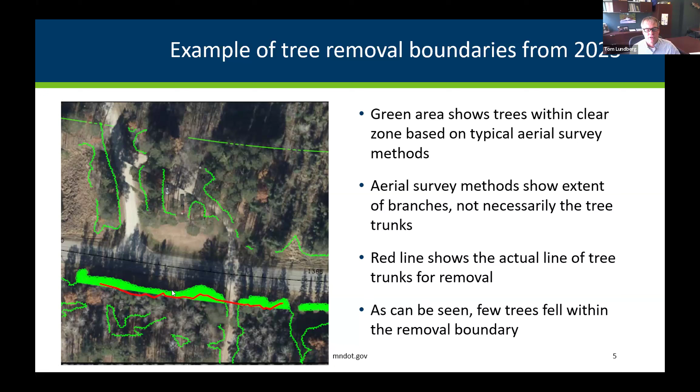This picture shows a little bit of what we're doing for the cutting when we did the project back in 2023. The red line follows the trunks of the trees, and the solid green area is more of the canopy, showing just how little we cut along there. You can see some of the shade trees hitting the roadway in this area, so you can see some of the shade issues we're dealing with.

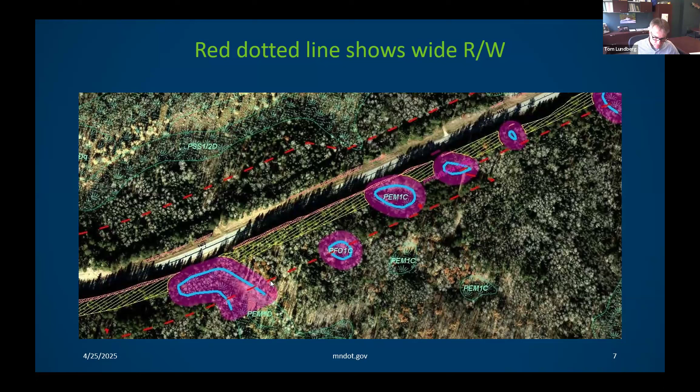So we worked with the U of M to get this study going. We actually started two winters ago and went through this last winter, which brought us up to today. I'd like to say we hit the ground running, but we really didn't that first winter. We were working with sensor issues, cameras out there, different types of data collection, and we were really just getting things going and figuring things out more two winters ago.

Sorry here. Should have shut my phone off.

So 2 winters ago was kind of tough. This past winter, we got into the details and started to work our bugs out with the different data sets that we're collecting and things we were doing.

So I felt like we were getting more our feet underneath us and gaining some traction. The U of M staff is going to go into a lot of the details, so I'm not going to cover everything. But the one big thing we got this last winter that was huge was we were able to get a data collection device into our snowplow that was out on this corridor.

In the past, we'd load the plow up and they'd go down the road, and they might go on Highway 34 and do touch-ups somewhere else. It was really hard to track what they did, where, and how much was being used.

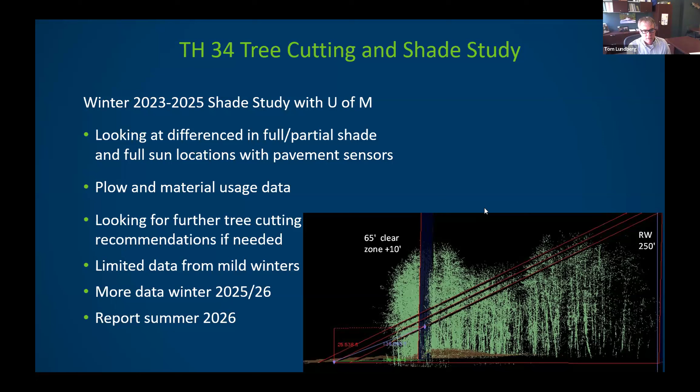We're constantly learning and growing as we go. So there's some rabbit holes, I think, that we still may go down with this. And then we'll look for potentially something in the summer of 2026.

So with this, like I said, we're looking for the results at the end of all this, whether we cut a whole bunch more, we limb some trees, we selectively cut some stuff, or maybe we do nothing.

Just to give you a pictorial here, this is a sun angle in March in the year. So if you wanted to get rid of the shade off the roadway, everything above that red line there would potentially have to be cut or limbed or something like that. So you can see what the shade is doing to the roadway.

At the end of the day, we'd all love it if we can limit the use of these behemoths that we have down the roadway with the time, the effort, the materials and things like that. If we can limit that, it saves a lot of money and resources, and it impacts the environment with the chlorides and things like that.

So there's the things that the practitioners and us are looking at, but on the environmental side, they're also concerned about the aesthetic value, the value of the trees, and the beauty of the corridor, the commerce that flows through it, and things like that. So those are some of the things we'll be struggling with as we move forward.

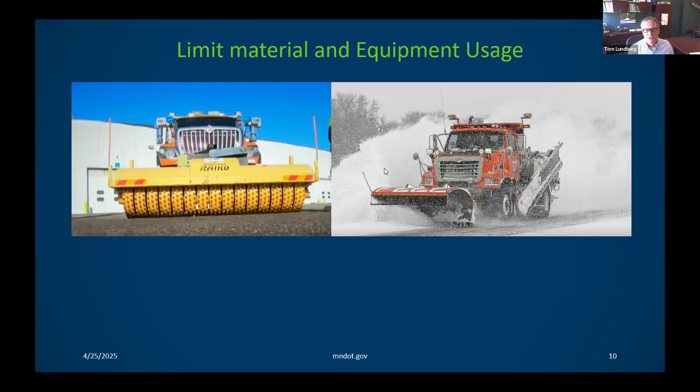So with that, I'm going to quit talking here, and I'm going to let Mihai and his staff jump in on some of the fun details that we've gotten into with the data collection and the techie portion of this stuff.

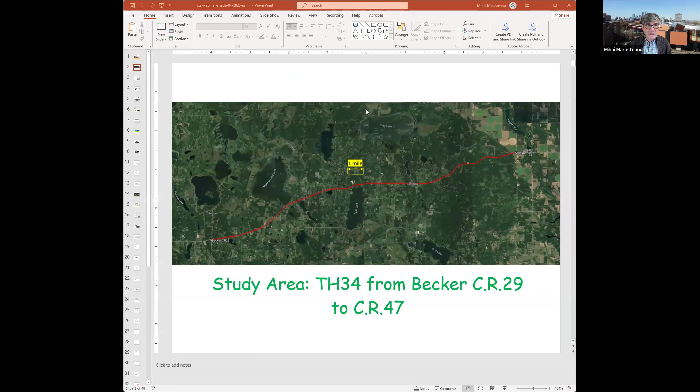And as Tom mentioned, basically we're trying to figure out what is the impact of the shade, tree shade, on pavement temperature that is then related to the amount of salt or other de-icing chemicals that are placed on the pavement. So obviously a safety issue, you don't want to have any skid problems, and also an environmental issue. And basically, Tom asked us, can you quantify this temperature disparity? I mean, we could see it. I think we can all see in winter shade versus full sun areas, and you see a big difference.

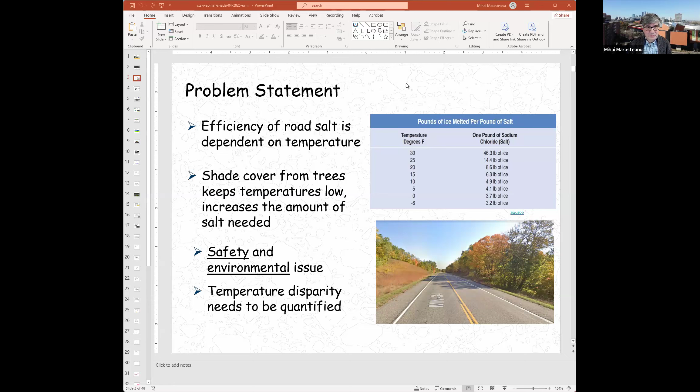So then we got to work, and the first thing that we wanted to do is to collect some data, use that data in a heat transfer model that would allow us to make predictions for various temperature regimes in winter, and include a shade factor that has not been evaluated before. There is some limited research on the effect of shade on temperature, mostly for hydrologic design on rivers, but not on pavement. So as far as I know, this is the first one that looks at the effect of tree shade on pavement temperature.

And based on this shade factor analysis, give Tom and his team enough information so they could optimize possible tree removal activities. As we mentioned before, we are all for trees and shade, but there are some particular situations where maybe there is a need to do some removal.

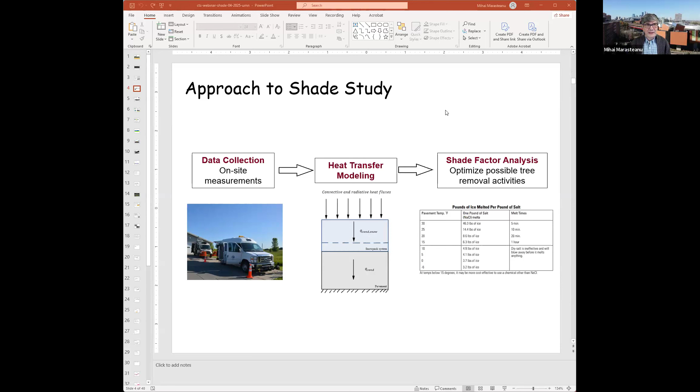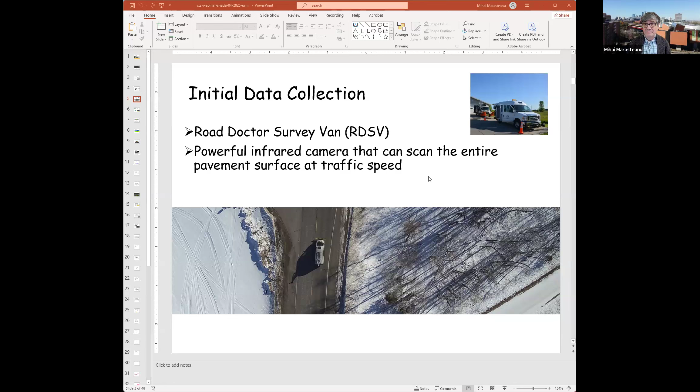And of course, we started with data collection. I'm showing here a picture of a very fancy device that our colleagues at MnDOT have. The one in the back here is a Road Doctor. We were very fortunate to have them come and collect the data using what is called the Road Doctor survey van. It collects all sorts of interesting information, including ground penetrating radar. But for our particular case, we used their infrared camera. They have a very powerful infrared camera that can scan the entire pavement surface at traffic speed and generate a lot of data. And we were able to get some information in February 2023. So yeah, we started working on this 2 years ago.

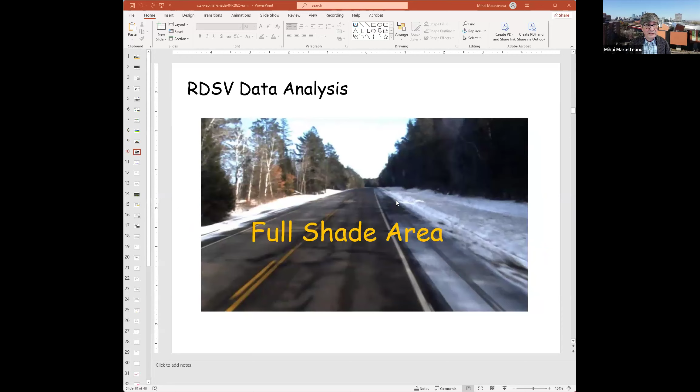And what we did first, we processed the data. We tried to look at the temperature profile for the locations that were in the sun and locations that were in full shade, and look at the difference.

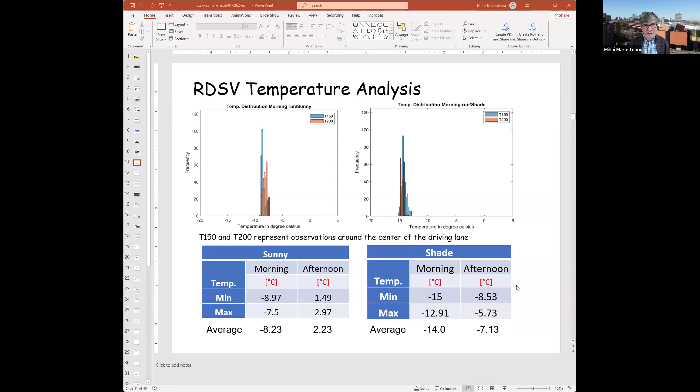In the shade, as expected, obviously much lower temperatures in the morning, -15. And then it went to -12. The max was -12, so not a very large maximum value. And you can see also that because the sun did not have the same effect, you can see just a smaller increase in the afternoon temperatures.

So these were the initial results. Again, it was just data for 1 day. However, that was very, very good, very useful data. So the shaded area is around 6 degrees Celsius or 10F colder than the sunny areas in the morning. The shaded area is around 10 degrees colder than the sunny area in the afternoon, again, because the sun cannot do a lot. And always the full sun surface temperature was higher.

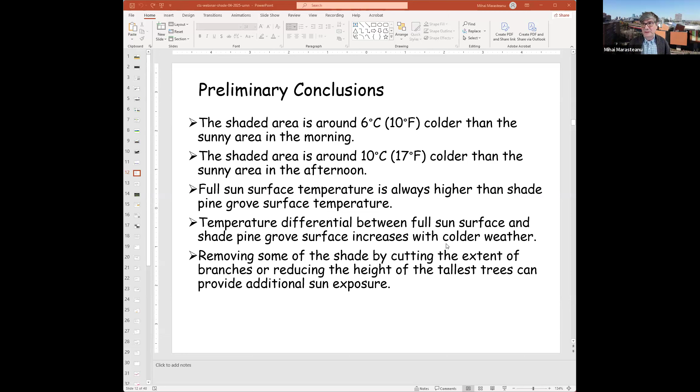So we basically proved what we all sort of know, that the full sun areas were much warmer. And we also found out that the temperature differential between full sun and full shade increases with colder weather. And at that time, we were starting to think maybe do some partial cutting. I mean, we were just starting to think about it. But of course, this was just one data point, so to speak, one big data point in 1 day.

Then, of course, we started to think, what's happening if we are to measure in a different time of the year. And the solar position obviously is very, very important. It has a direct influence on the tree shade length. And to better understand this effect, we actually used a very nice tool. Actually, Tom and his team told us about it.

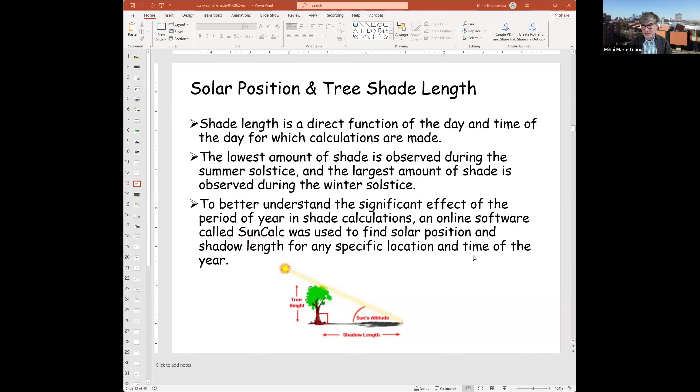SunCalc, it's a free piece of software that does exactly this, gives you the shadow length for any specific location and time of year. So you just need a specific location. And of course, if you want the shade length, you need how tall the tree is. This is what it looks like.

So this is something that at some point MnDOT should consider when you do the optimization. What are you trying to do? Do you want to remove shade completely all year long, or are you trying to limit, maybe reduce shade in the months when it's the coldest, like January, February, where the shade length is smaller?

This was all great. We got to play with some exciting data, but of course the issue is we couldn't bring the road doctor there every time. So it was a great idea, and I'm very happy that they were able to do so. Our colleagues in District 4 purchased some sophisticated temperature sensors and embedded the sensors in various locations on Highway 34 that cover full sun, full shade, and some intermediate areas also.

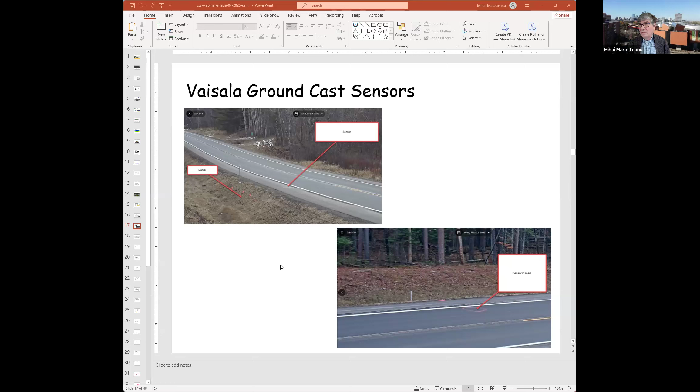And we got very excited because now we had continuous measurements. Some pictures of where these Vaisala ground cast sensors were placed. The team also had cameras installed so you could see if it was snow or rain or whatever. So all of this information was available to us. Lots of information. Luckily, we had the right people to deal with all this information. Stanley and Mober did a great job working with this.

And we also had access to additional data. It was not in exactly the same location, but it's in a weather station not too far that provides, as part of the web MDSS, air temperature, shortwave radiation, precipitation, and so on. So we had all this data available to us.

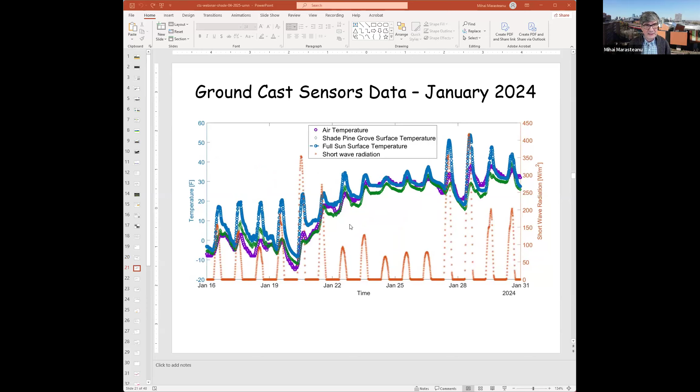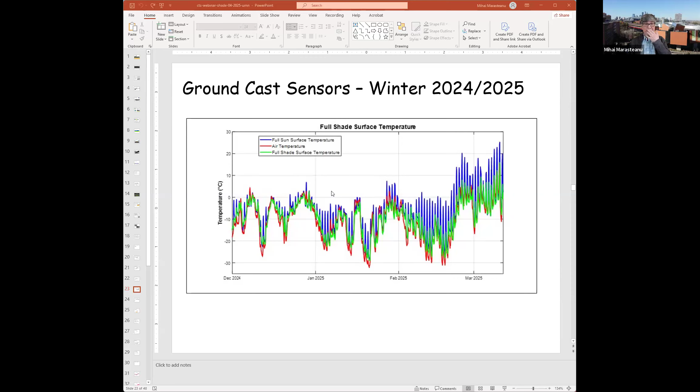And more data just to show you what it looked like with shade and full sun and air temperature, January 2024. And we continued the project. So we obviously collected this winter as well. We got some colder days, not a lot of snow. We hoped also for some snow to see the effect of snowpack. But again, you can see here, obviously, full sun pavement surface temperature much higher than the full shade surface temperature, as expected.

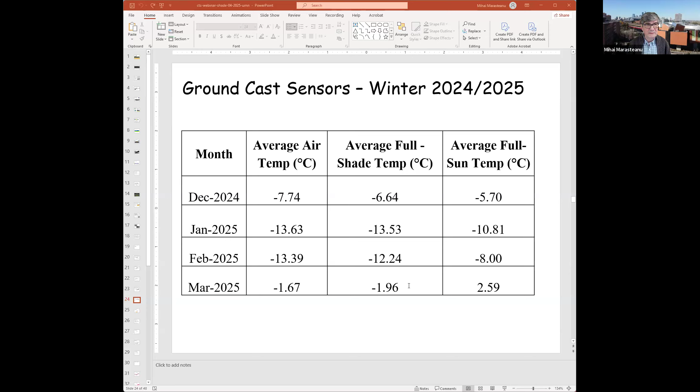And a key component of this was the development of the heat transfer model. The initial model we developed using MnROAD data from 2015. Naum Yelizarov started working on that, and then Sanley stepped in when Naum graduated, and he continued the work. So the original work did not have a shade factor, but we were able to include a shade factor in the next iteration. So Sanley, if you want to discuss the heat transfer model.

All right, thank you, Dr. Marasteanu. As you just mentioned, I will be focused on the heat transfer model, which was initially developed using MnROAD data from 2015. This model aimed to simulate the thermal behavior of the pavement structure. And it's important, like you just mentioned, this model does not include the shade factor, but we will include the shade factor later in the presentation.

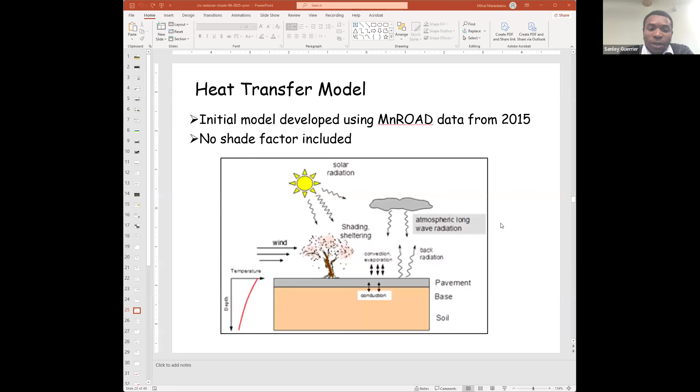For the numerical implementation, we use the MATLAB partial differential equation solver, also known as PDEPE. This solver is particularly effective for solving parabolic and elliptic partial differential equations in one spatial variable and time. We also use an explicit finite difference volume approach, which discretizes the domain into small volumes and applies the finite difference method to approximate the derivative.

And additionally, we use the Crank-Nicolson method, which is a time-stepping scheme that is implicit in nature. This method is known for its stability and accuracy, as it averages the value at the current and next time step. It requires 2 to 3 iterations to achieve convergence at the first layers before calculating the remaining layers, ensuring that the solution is stable and accurate.

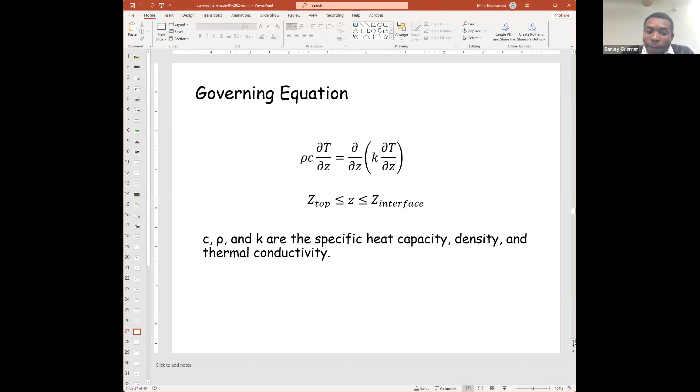The governing equation for our model is derived from the heat conduction equation and that is shown here. This equation describes the rate of change of temperature within the pavement material as a function of its thermal properties and spatial gradient of temperature. Next slide.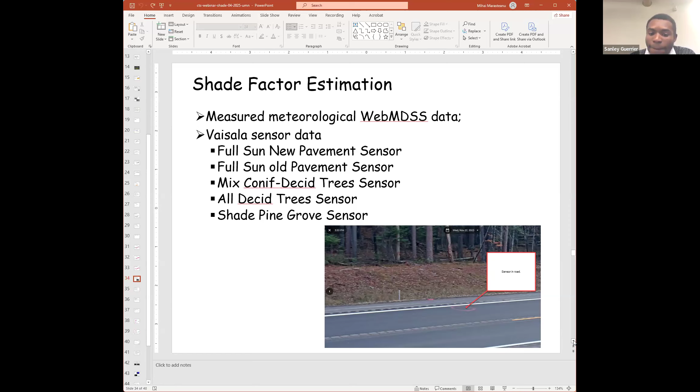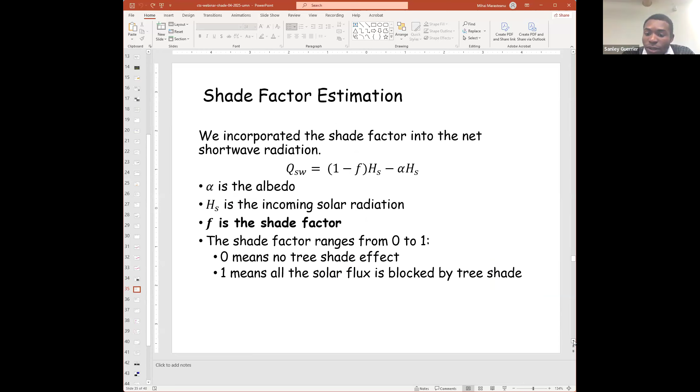We incorporate the shade factor into the net shortwave radiation. This is the equation of net shortwave radiation shown here. The shade factor ranges from 0 to 1, where 0 means no tree shade effect, and 1 means all solar flux is blocked by tree shade. This adjustment allows us to account for the impact of shading on the pavement temperature. We first optimize the model to determine the pavement thermal properties because we don't know the exact pavement properties. Then we optimize the model to obtain the value of the shade factor.

For the data collected in winter 2024-2025, the optimization result for the shade factor in the full sun is 0, as we expected. But for the full shade, we get a shade factor of approximately 0.5, meaning that the trees reduce the incoming solar radiation by 50%.

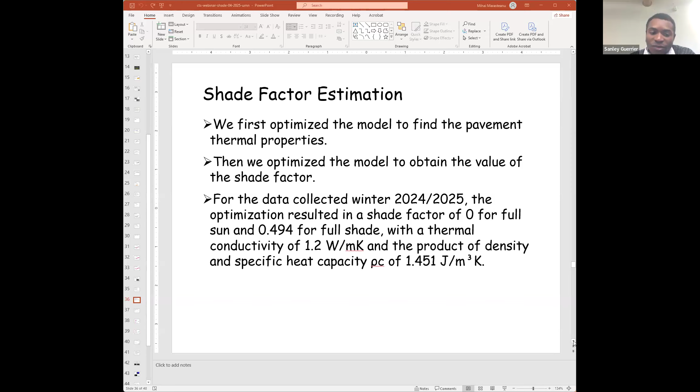We validated the model by first predicting the temperature at the surface and at 6 centimeters below the surface. Then we calculate the root mean square error between the model and the measured data. A lower RMSE indicates a better fit of the model to the data. Then we calculate the R squared, which measures the proportion of variance in the measured data explained by the model. A higher R squared value indicates a better fit.

Then we plot a best fit regression line to visualize the relationship between the predicted and measured temperature. Finally, we plot a one-to-one reference line to show how close the model prediction is to the measured data. The closer the points are to the one-to-one line, the more accurate the model is.

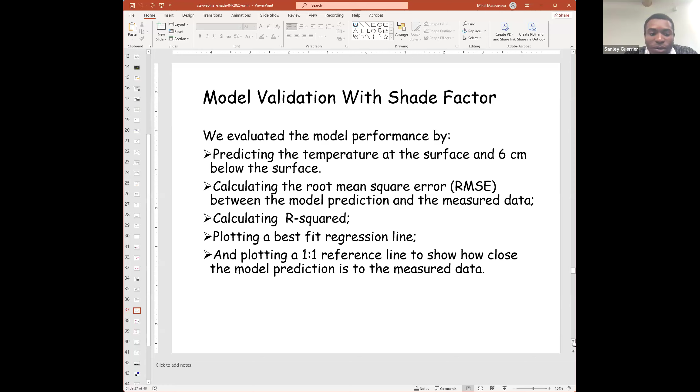Okay, thank you, Stanley.

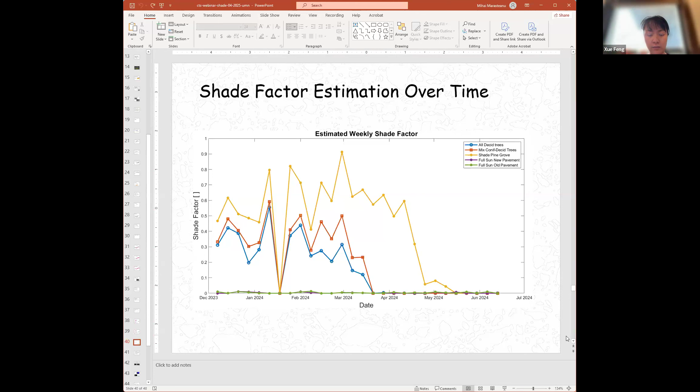And so what we hope could be done is to extend this analysis into more periods when we have variable wintertime temperatures, and especially for when the temperature is much, much lower than the freezing point, so we can get a better picture of what the shade factor is doing in this model. Next.

In addition to that, we hope to connect this parameter for the shade factor in the model to specific tree measurements that we can take on the road, right? And so these tree configurations can correspond to things like how high the canopy is, how far is the canopy from the pavement itself, and also to think about how we can leverage this type of information and data to also evaluate not only the impact of shade during the wintertime, but potentially during really hot, extreme summer days too, when actually having shade would come at a benefit for reducing pavement temperature and potentially increase pavement durability.

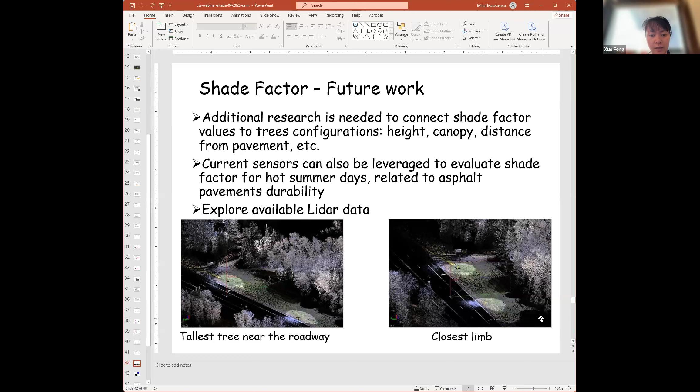To connect the shade factor to physical characteristics of the trees that we can measure, we can take advantage of existing LiDAR data, like the photos that you see on the bottom there, which can extract information about, for example, the tallest trees near the roadway on the left, and the trees that have close limbs to the road as well.

All right. I think I'll pass it back to Mihai now. Thank you, Xue. As Tom mentioned, we were able to get additional data. We are very excited about this possibility, because now we could relate the presence of shade and the effect on temperature with material usage. And I know Tom and his colleagues spent a lot of time trying to figure this one out, and this was excellent work that they've done.

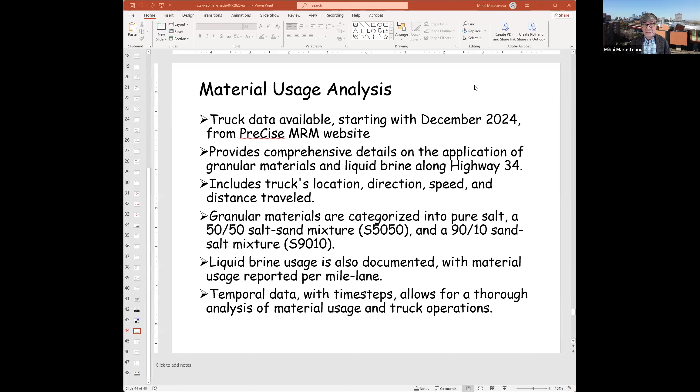And now we have this capability of looking at material usage. We just started to look at it, so I'm just going to show some preliminary data, and hopefully next year, if the project will continue, we'll have much better information. But this was available from the PreCise MRM website. As Tom mentioned, it provides comprehensive details on application of granular materials and liquid brine along Highway 34.

Granular materials are characterized into pure salt, a 50-50 salt-sand mixture called S5050, a 90-10 sand-to-salt ratio mixture called S9010, and also liquid brine.

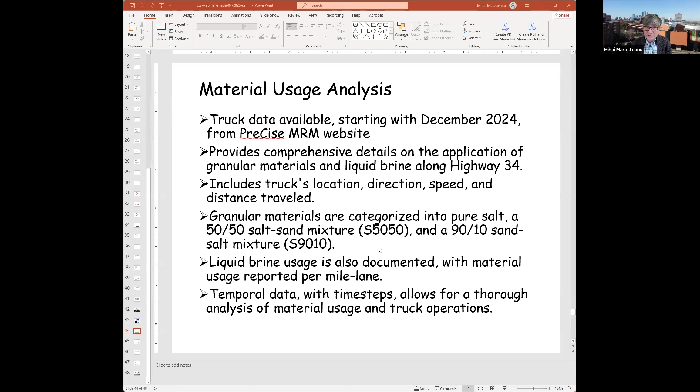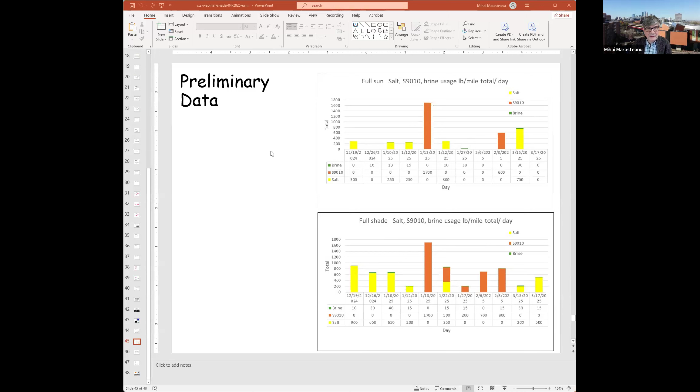Just by looking at the plots, you can see there's a clear difference - in the full shade there are a lot more materials and chemicals used on the pavement. I asked Tom about this particular day where it appears to be the same, and he said that was a very nasty day with a lot of icing, so they decided to spread S9010 across a larger portion of the pavement, just in case.

So just by looking at this preliminary data, we were able to do some simple calculations and found that for the full shade pavement, to get rid of the ice and make it safe, almost twice the amount of materials was used compared to the full sun pavement. Looking at the granular S9010, again almost double the amount used compared to full sun. The same could be said about the brine. Very interesting data - we didn't have access to it before, but I think it's very useful.

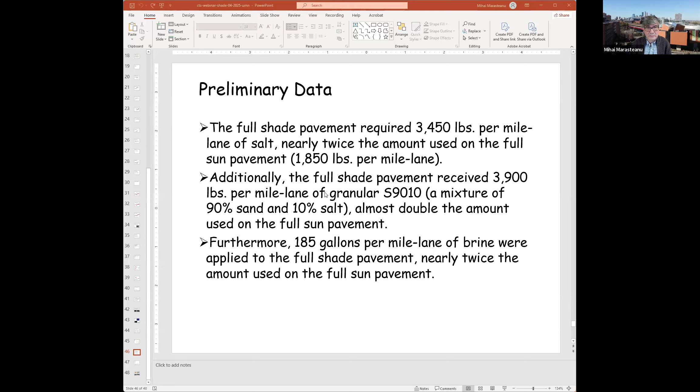I think it's very useful for winter maintenance operations as well, because just by looking at this data, they can actually optimize and improve their operations.

This brings us to the end of this presentation. A few important conclusions: we were able to show there is a significant temperature difference. We have numbers now - as I said, we all knew this was the case, but we didn't have a sense of the magnitude of the temperature differential. Clearly this has an impact on winter maintenance operations, so there is clearly an impact, shade versus full sun.

We were able to develop a very robust heat transfer model, and we're very happy with that. This model includes a shade factor. Obviously we need now to relate the magnitude of the shade factor - what does it mean in terms of type of trees and tree configurations? This would be key to providing guidelines in terms of possible tree removals or partial cutting.

We also think the research, and the sensors still in the pavement, would be very useful for continuation of this project - not just for winter maintenance operations, but also to look at the entire year and address hot temperatures in summer. We could expand this analysis to other locations in big cities, for example. This is very useful initial data, and also the capability of accessing the sensors 24/7 is very, very important. We hope we will be able to continue this research.